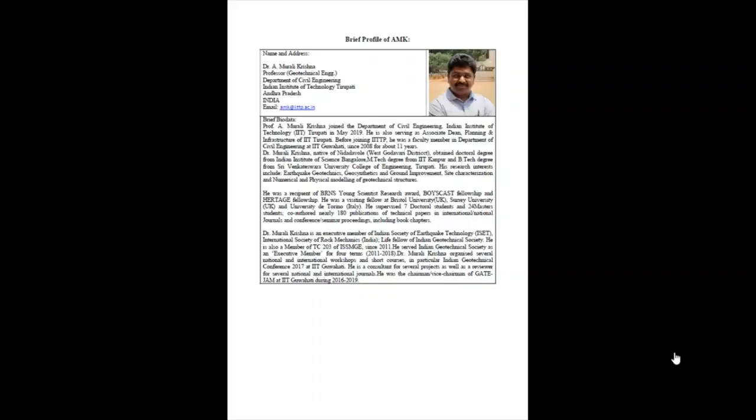Just want to know how many participants are there and who are all there. I can see only a couple of participants, something like that. And how many among them are students and how many are faculty, just to have some idea. Do you have something?

So we have almost around two sections, around 280 students plus faculty around 20. How many joined in this webinar? As of now, around 120, including faculty and students. So they may be joining.

Okay, fine. Coming back to the talk, today I have chosen the topic: sustainable utilization of scrap tire derived geomaterials for civil engineering applications.

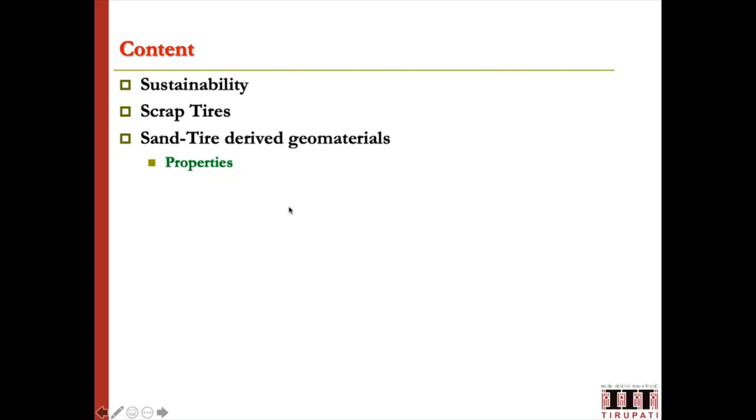The talk will go like this: I will briefly touch upon what is sustainability, what are the primary components of sustainability, and we will see some information about scrap tires - what are scrap tires, what are the problems associated with them, and then we'll see the term geomaterial, and scrap tire derived geomaterials - what are the various scrap tire derived geomaterials and their properties.

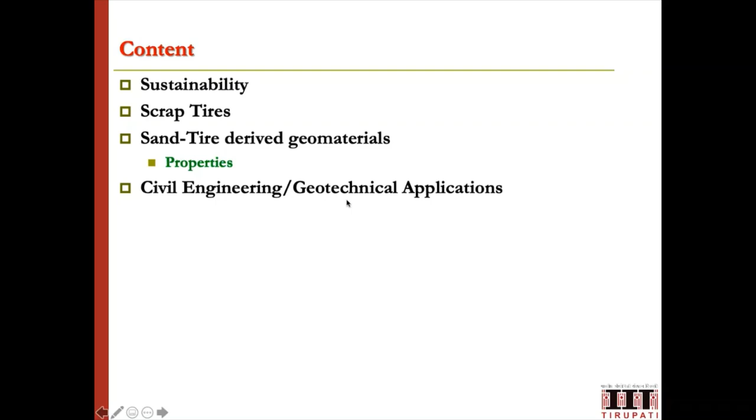Then we'll broadly see various applications in civil engineering, particularly focused on geotechnical applications. Then retaining wall applications, which is basically from my research, my students' research efforts - one master's student and one PhD student worked on using scrap tire derived materials for retaining wall applications. I will explain this through model studies and how we are addressing sustainability. That aspect will be touched upon at the end, and then I will conclude with my remarks.

This is broadly the content I have taken here.

Coming to sustainability, I'm not going into the topic in depth because it's vast - we could talk several lectures, there is a special course on this one. But as a simplified understanding, what is sustainability is just here.

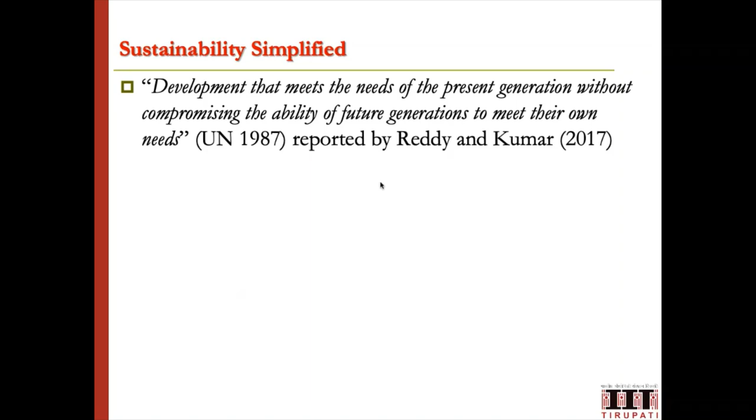That's the main object of sustainability over the generations. So it's basically sustainability linked with the 3 E's.

It's a triple bottom line concept they highlighted here. It will deal with the environment, and it will deal with economics, and it will deal with equity.

Equity, in the sense, means society and the people and their requirements - those societal things come under the equity content. And environment refers to what resources we are trying to use for any application or infrastructure.

At the same time, for any engineering structure or concept we have to balance the economics. So they are all interlinked - equity, society, and environment.

So there's growth, control, or conflict, as we keep on using the environment more now and in the future, with whatever complications arise.

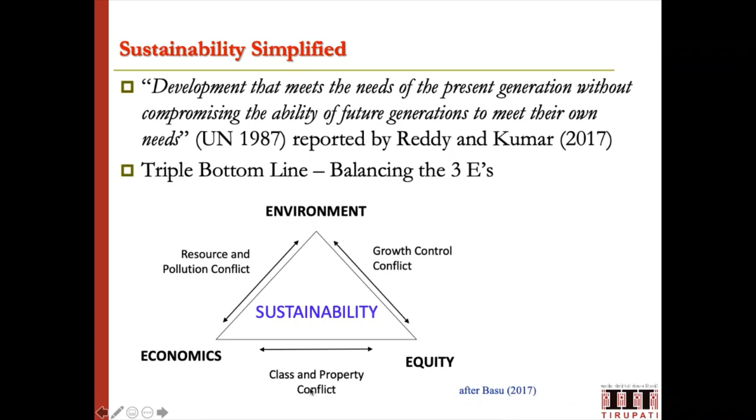Similarly, economics is linked with class and property, which creates conflict sometimes. If you make something very costly, fewer people can utilize it.

If you make it more reasonably economical, then many people can use it, but they will complement each other. And then environment and economics are again linked in terms of resource and pollution conflict.

We have to minimize pollution when balancing the environment. At the same time, we have to intelligently and smartly utilize resources as well, which need to be sustained for future generations, while also balancing economics.

It should be an economical project, so they are all interlinked. In a nutshell, what we can say is maintaining this environmental need, economic need, and equity need in terms of societal requirements.

If you are generating any project or product which is meeting present day requirements and can also help future generations meet their requirements, that's how we maintain sustainability.

That's basically sustainability in simple terms. We will now see how sustainability relates to today's topic.

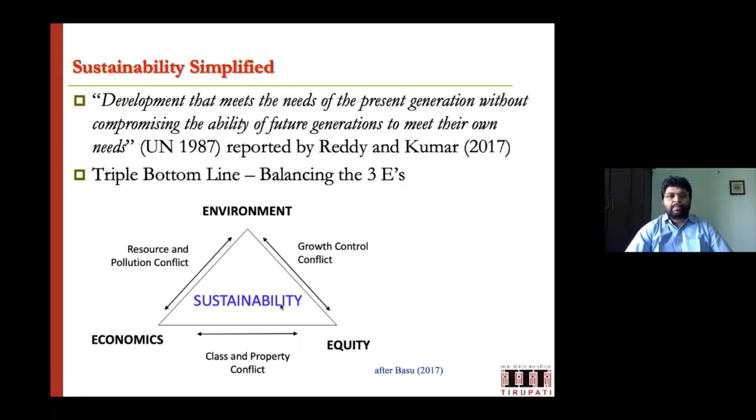Next, coming to scrap tires - what are scrap tires? Scrap tires are, as written here, undesired urban waste, which is increasing every year, as across the globe there is a tremendous increase in motorized vehicles.

So about 200 to 300 million tires in the United States, about 20 million in Korea, and about 112 million in India, which was reported in 2006.

That means almost about 15 years back this was reported. You can imagine what volume of tires is being generated now.

So in future, the increase will be significant in developing countries like India. Of course, now we are almost functioning like developed countries, but there is still some verge of development.

We can see much higher levels of development coming.

So what are the issues with scrap tires? As mentioned in the earlier slide, the rate of generation is very significant - huge amounts of scrap tires are being generated. What is the main problem?

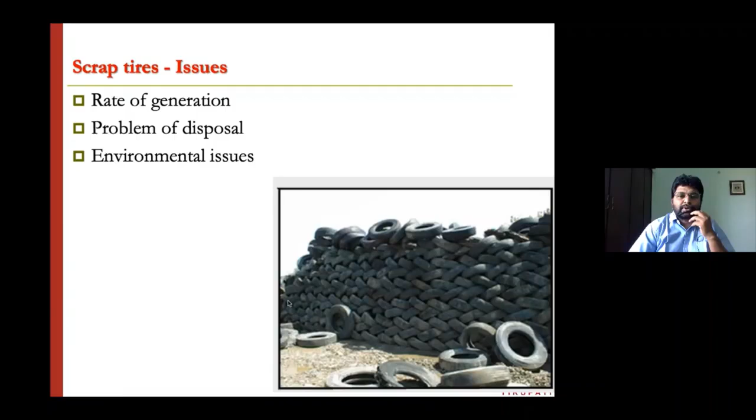So the way to solve these particular issues in a sustainability approach is to see the possible use of these waste materials for various applications.

This is the sustainability approach. What is the approach here? A waste material is something we try to use for some application. That way we can consume some of the waste material and reduce the disposal of the waste to some extent, though it may not be completely solved. Accordingly, we can reduce the problem of disposal to some extent, and the associated reduction in environmental issues can also be taken care of, because anyway we can't control the rate of generation. Only the second two points can be handled if we properly explore the sustainability approach in the utilization of waste scrap tire material for various applications.

Keeping this in view, several investigations are being carried out globally, and several applications were also reported in the literature, which were being used in different places.

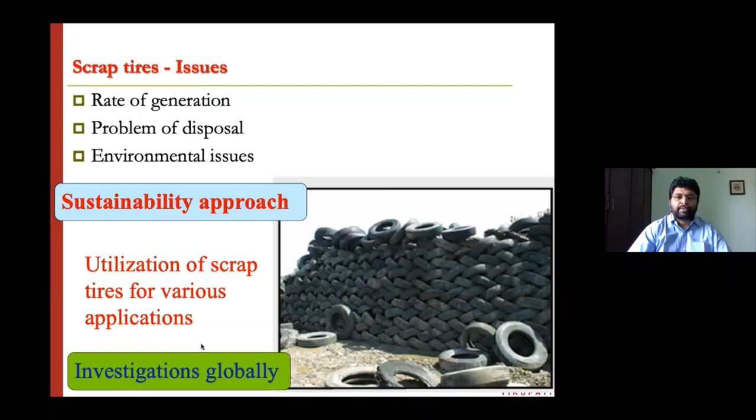So how are they utilizing it? The earlier slide showed some scrap tires being utilized for various applications. Which industry, which sector are they using it in? This slide gives some information, again from 2002. You can see the civil engineering application, particularly our current focus, is using about 14.2%, whereas other applications use different percentages. Another major use is in terms of tire derived fuel, which is utilized more. But it has different environmental issues, releasing a lot of pollutant gases and other things. It is not advised to use for tire derived fuel, but different percentages of people are still using it.

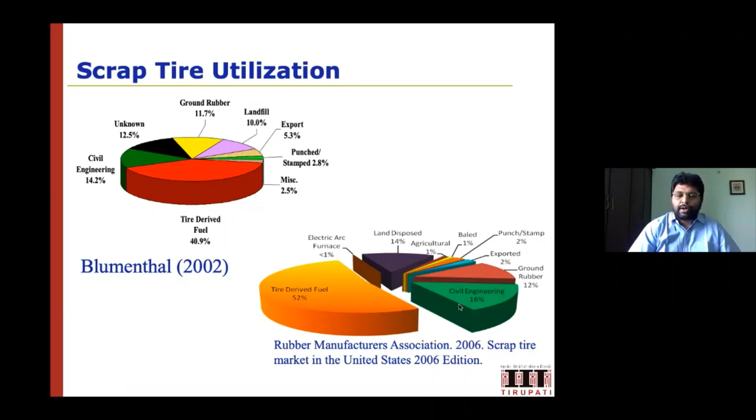Coming to the 2006 statistics, I want to draw your attention to the relative increase in the percentage of civil engineering applications. Here it was 14.2% in 2002, and in 2006 it became about 16%. There is a slight increase in civil engineering applications. That's how people are using these scrap tires in civil engineering applications.

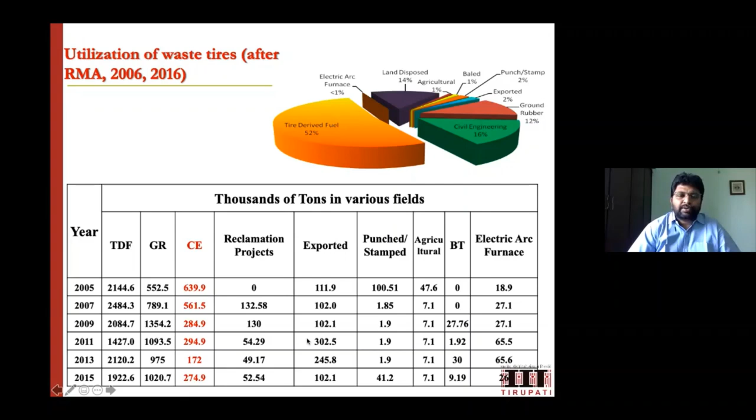Now coming to scrap tire derived materials, what materials can be obtained from scrap tires? One way is to use the tire as a whole, as a very bulky tire with a lot of mass. We can use it for some applications as a whole tire, or otherwise we can scrap it into different sized pieces. There is a particular ASTM standard on the use of scrap tires in civil engineering applications, which is our current focus here. We'll be looking into civil engineering applications.

In this ASTM standard, it shows different sizes and their names. It's broadly divided into three types. One is tire crumbs, with a maximum size of 12 mm, looking like this. Tire chips range between 12 to 50 mm, looking like this. Tire shreds range from 50 to 305 mm, about 1 foot in size. You can imagine when you cut big tires into 1 foot size pieces, you get large tire shreds in this form. So depending on the application, one can choose which type and size of tire derived material is suitable, and pick that particular material.

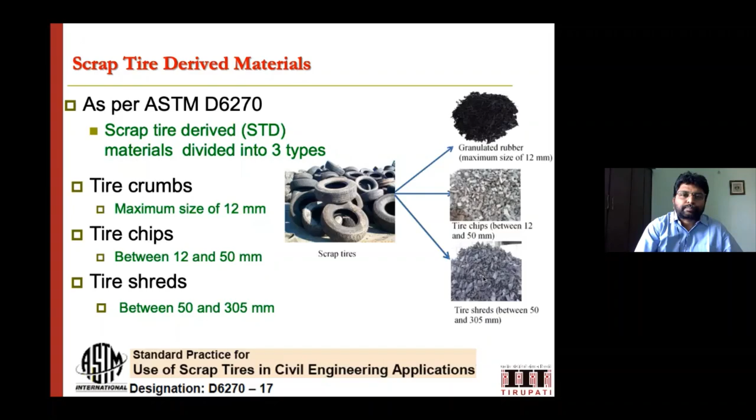Besides this, tire derived aggregate is another terminology now being practiced, using the tire with some other material extensively - crushed rubber from waste tire. Other than the earlier three materials and tire derived aggregate, if you crush this into a very fine form, you can use this as crushed rubber, which was recently reported in 2018.

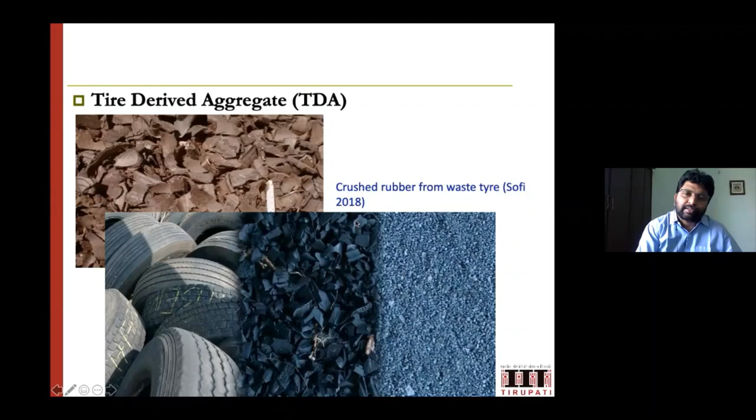Now that we understood what scrap tires are and what scrap tire derived materials are, we'll go a little into the engineering part of the application. When we need to go for engineering applications, we need to have the properties of the material, right? Otherwise we can't just take the material and use it, because there is a lot of engineering we have to do.

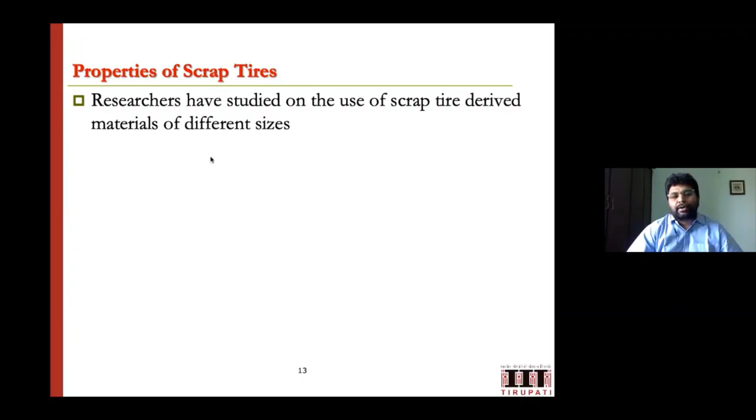So keeping that in mind, several researchers have studied the use of these scrap tire derived materials of different sizes. As I mentioned, it can be derived into different sizes, so we need to understand these different sizes and their properties.

This is some literature review on specific gravity. Basically, when you look into any material, first we look at the specific gravity - whether it's stone, concrete, cement, brick, or soil, whatever it is. For specific gravity, unit weight is a very important parameter.

You can see the range of specific gravity of studied tire chips is ranging from 1.02 to 1.24, as reported by different researchers who have worked on that. The unit weight values can range from 2.4 to 6.96 kilonewton per meter cube.

I want to give a thought to the students here - think about the range of specific gravity of various common engineering materials you've come across, particularly aggregate, brick, or soil. What is the range of specific gravity? What is the range of unit weight you are dealing with? And then compare that to the range of values you get from tire materials.

Obviously, if you compare these things, you can see the very low specific gravity and very low unit weight. With these properties, you can combine this tire material to make a material with much lesser weight - that is one immediate observation one can make, right?

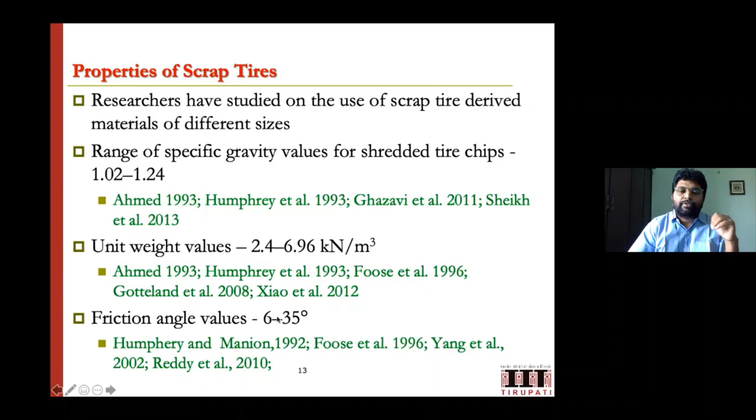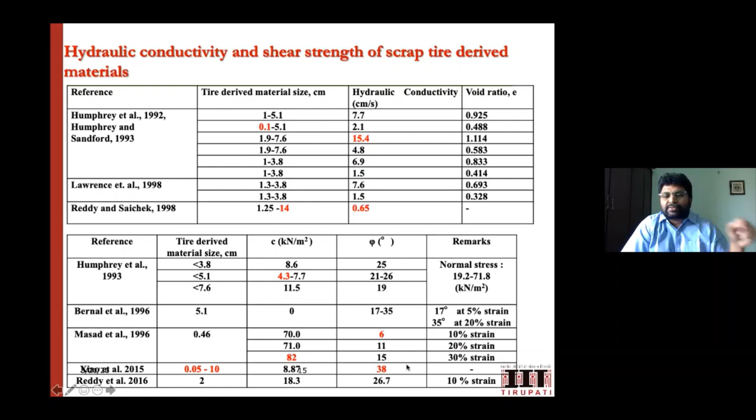Okay, so these are different values. Now, so that covers the STDs, scrap tire derived materials and their properties. The use of the STD materials, how we can use them.

As an engineering application, particularly in civil engineering applications, you can see STD materials are used in a wide range of civil engineering applications due to the advantages in their properties. We have seen the properties.

Values, and we can also, most of us know the durability of the material, how it will be there. So it has high durability, okay, low compacted dry density and thermal conductivity, and high hydraulic conductivity is there, and high compressibility.

When you are keeping the scrap tires, they have a lot of voids, they can get compressed, they can absorb a lot of vibration. This is another good property we can get from the scrap derived materials.

So large studies are available on scrap tire derived materials applications, particularly for engineering applications, in terms of physical, numerical, and field model studies in the context of retaining walls, foundations, embankments, etc. So here particularly it is focused on theoretical applications, and different studies have been reported on that.

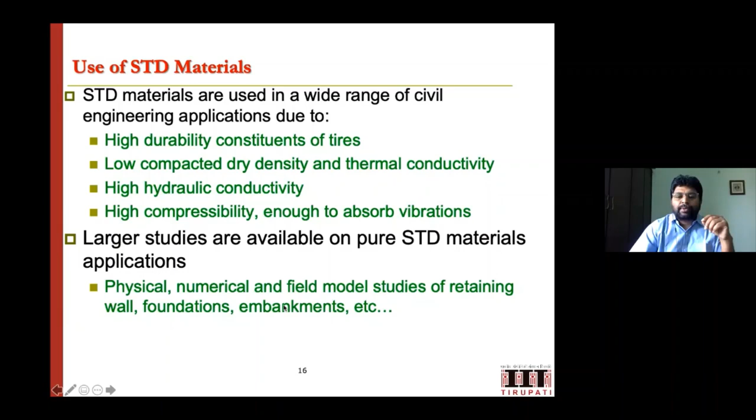Okay, with that, we'll just see broadly into what are the different civil engineering applications this material can be used for. One is the partial replacement of aggregates, which can be used in mortar and concrete, reported by these researchers. And in terms of asphalt mixtures for pavements, reported by these researchers.

They can also be used in landfills, massive landfills, and the backfilling of retaining wall materials, which is the current focus here. That's why it's highlighted here.

Different researchers have used this, and as we understood from their basic property, they have high permeability, so they can also be used as a drainage material, as a drainage system.

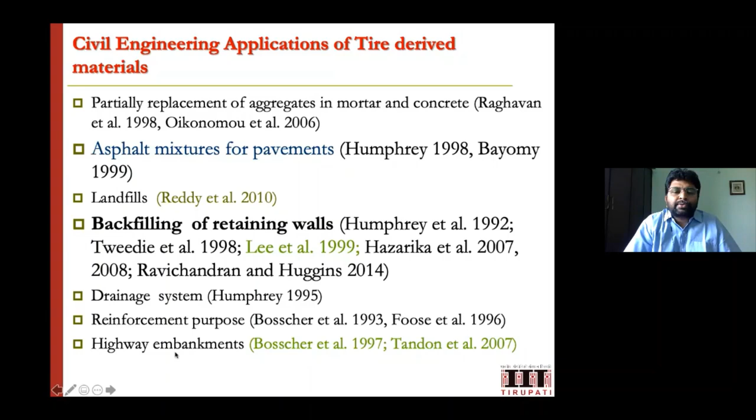Further, it can be used for reinforcement purposes and highway embankments, not only pavements - they can be used to build huge volumes of embankments also.

So these are some of the pictures which are reported in the literature. You can also browse through particular websites to see different pictures. Some of them I tried to put here just for completeness.

You can see here road embankment constructed with shredded tires, and shredded scrap tire used in road base in Odessa, Texas.

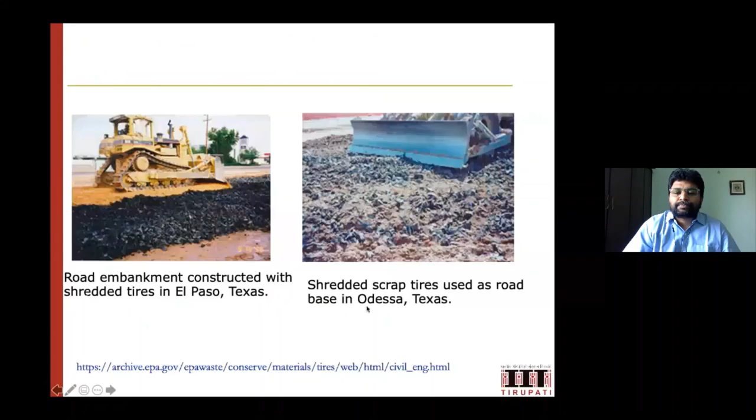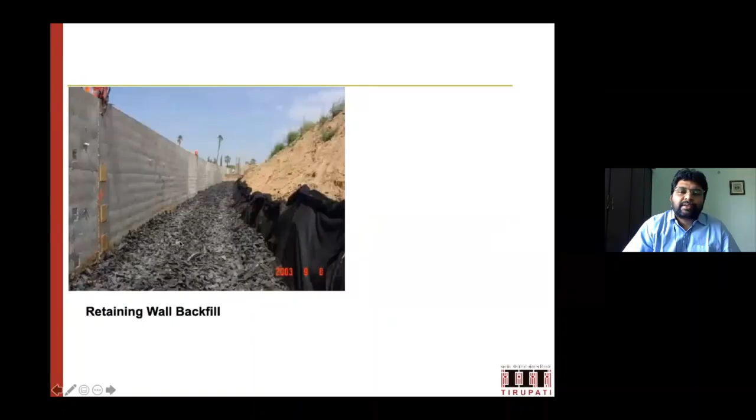And vibration damping layers beneath the rail lines are used, and the retaining wall backfill. There are some studies on the retaining wall backfill using such compressible materials.

So protection of seawall by using whole tires, as I mentioned, directly whole tires can be used for protecting the seawall or certain embankments, which can absorb a lot of energy.

Tsunami overflow testing apparatus - this is a study again conducted by Hazarika and group. When the tsunami overflow is happening, and immediately if you keep this huge volume of tires here as a whole, they work like very good dampers. They damp a lot of energy, and further losses and damages due to this water will be very less here.

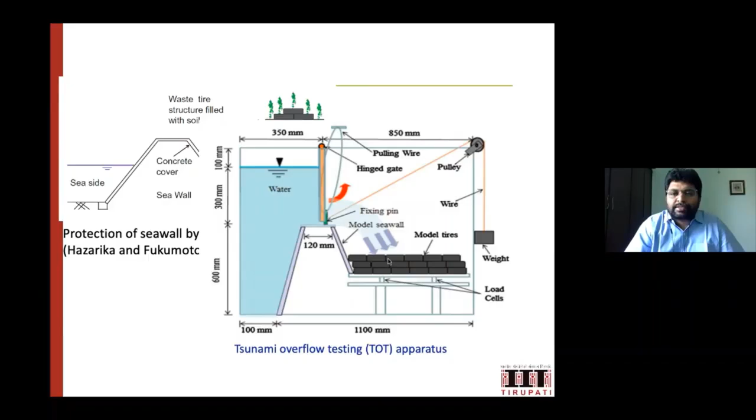So this is another thing - they can be used at the back of the retaining structure, gravity type retaining structure. There's a tire chip cushion there, and they can also be used in terms of drains, as tire chip drains here.

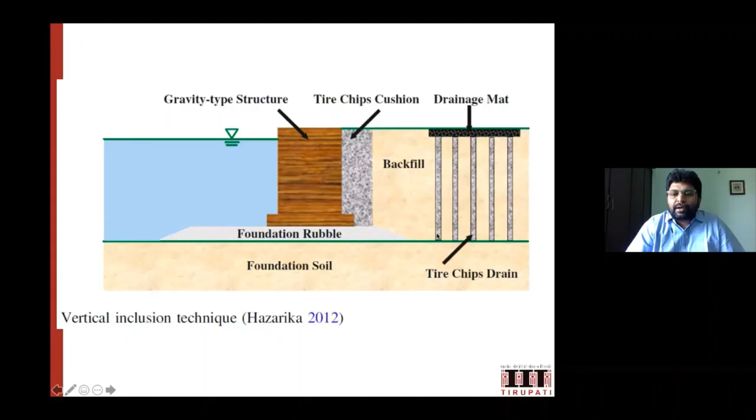And the use of tire rubber particles into concrete to replace the mineral aggregates, as it's also highlighted. Some studies are available in this aspect also.

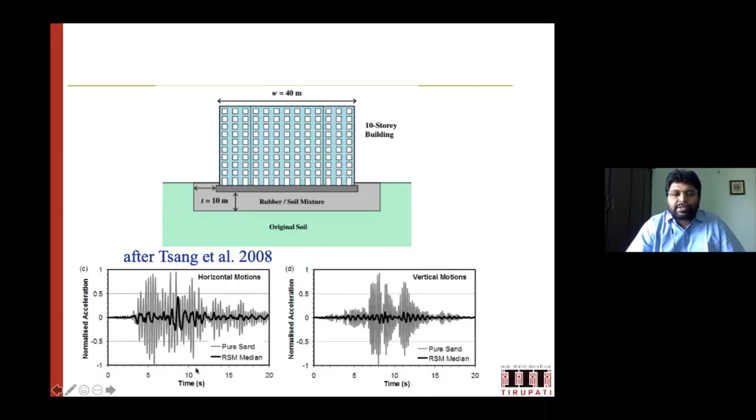This is one study where they showed base isolation using the rubber or soil mixture. A civil structure at the base uses the rubber and soil mixture, which is being tested to show it is absorbing those vibrations.

So that's about in general civil engineering applications. In terms of pavement structure, retaining structure, embankment, even buildings, and as tires alone, it can be used as geotechnical structures also.

Now coming to the geotechnical applications, what are the advantages one can get when using these scrapped materials into applications? One is that it creates a sustainable future, referring to the earlier sustainability concepts. If you are able to use the tires into applications, you are reducing the waste, you are reducing the disposal problems, and some significant part of natural material is being replaced by this waste material. That means you are reserving some of the natural material for future generations.

So in that way, we are trying to maintain sustainability. It creates a sustainable future, and it can also be used for reducing vibration. It can also be used to protect pipelines buried in the ground, because it has a lot of cushion and absorbing behavior.

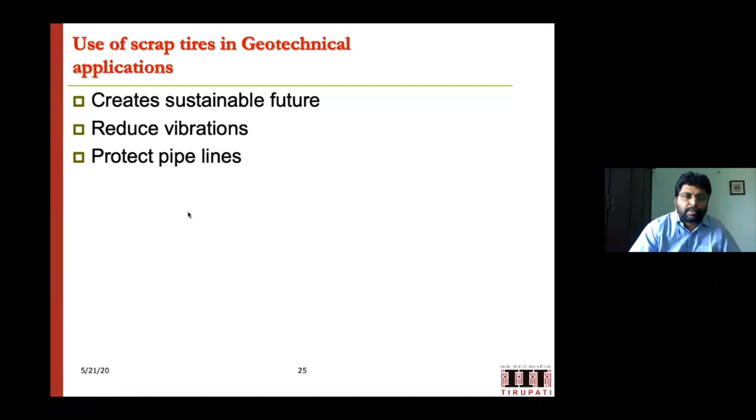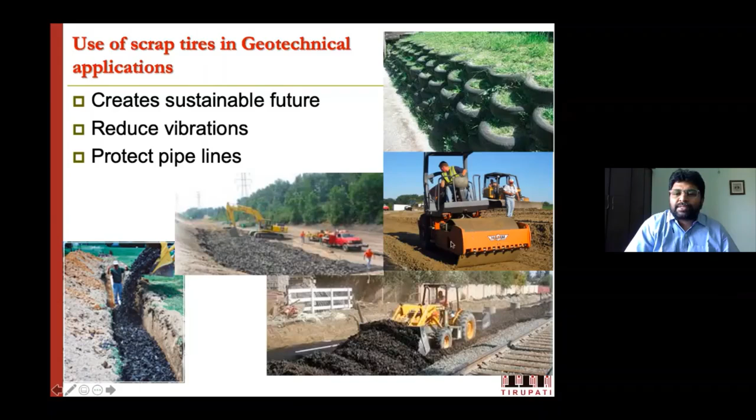Some of the applications again shown in the context of geotechnical applications. Some of these things which we have seen earlier also, like tires forming a small retention system, an embankment, a drain system, and subsurface drain for railway lines. One can see using the tire mixture into the pavement system. So that's various applications one can think of.

Particularly in earth retention systems, which we will be focusing on a little bit more. These earth retention systems are invariably being used in various infrastructures in urban development countries, because we are doing more development, more construction, and many retention systems are required, such as basement walls, bridge abutments and other structures.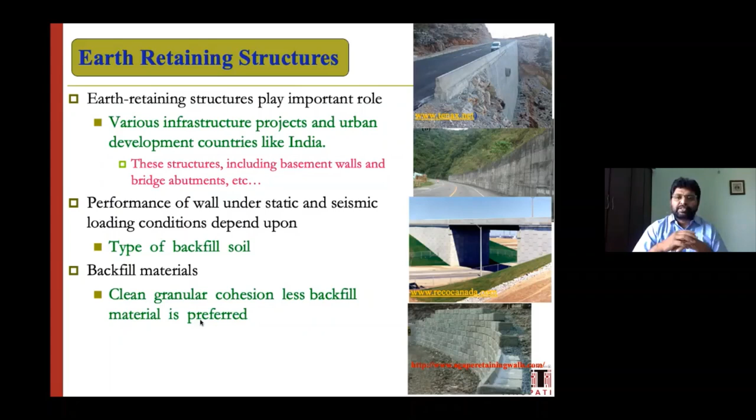So performance of these earth retention systems, retaining walls, basically depends on the type of backfill soil. Depending on the backfill soil, how much earth pressure comes onto the wall is decided, and the design of the wall structure also depends on how much pressure it is getting. Preferably the backfill material should be a clean, granular, cohesionless material, because it should be easily drainable. There should not be any excess pore water pressures which would cause detrimental effects on the retaining structures.

To minimize these issues, for example to reduce the pressure coming onto the structure and to reduce the demand, one can go for lightweight materials. Different lightweight materials can be listed as tire-derived geomaterials, EPS geofoam, lightweight aggregates, or wood fiber. This is some sort of material which can be used as lightweight materials, and of course fly ash, slag, blast furnace slag.

These are again predominantly used by our Indian researchers, because they are generated by different mines and thermal plants, which generate this slag and fly ash also. So on the other side of this topic, use of slag and fly ash is also a sustainable application one can see, which can be explored if somebody is interested.

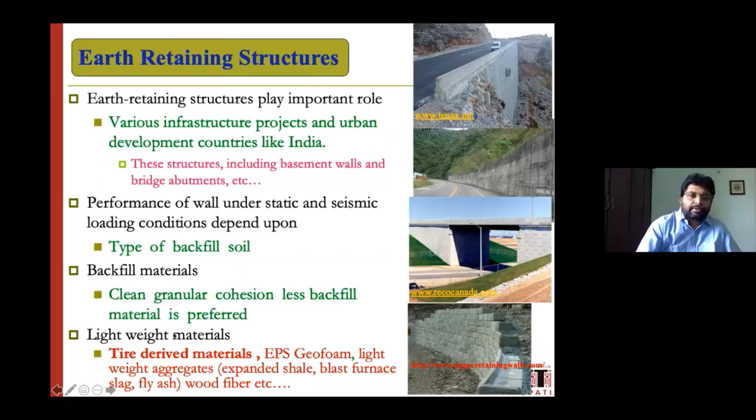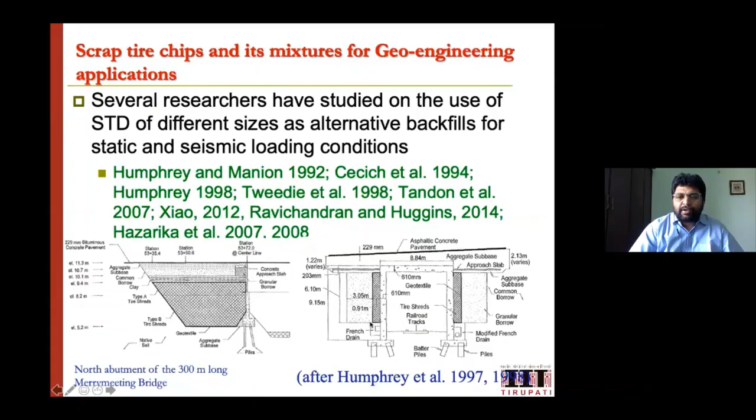So using the scrapped material as alternative backfills, including static and seismic loading conditions, different researchers have worked here. This is the abutment, and this is the retaining wall application where they have used it at the backfill. Some studies have shown the effectiveness of these materials.

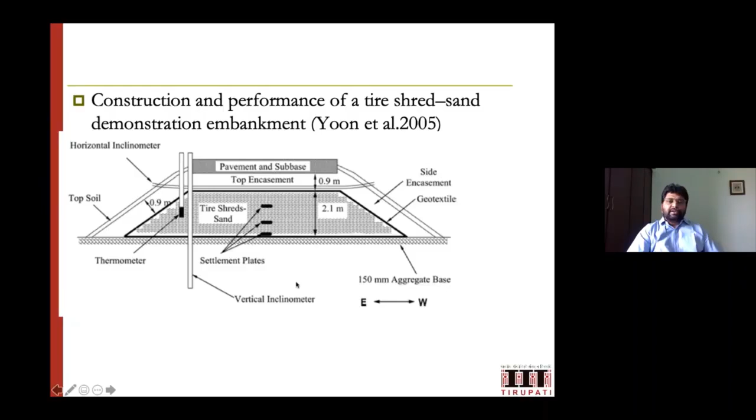So why I am saying all these things is that gradually we are looking into the material properties and their application. Before going to systematic application in the field, one needs to do thorough studies in terms of either numerical simulations, some analytical calculations, or otherwise some sort of model studies. These are the model studies which I am trying to show, how different people are using them.

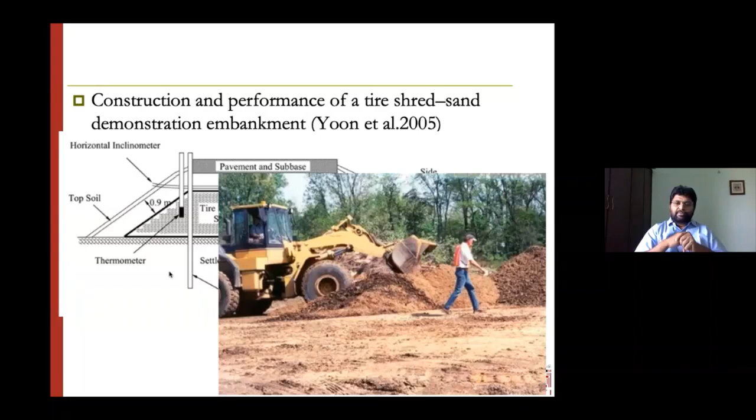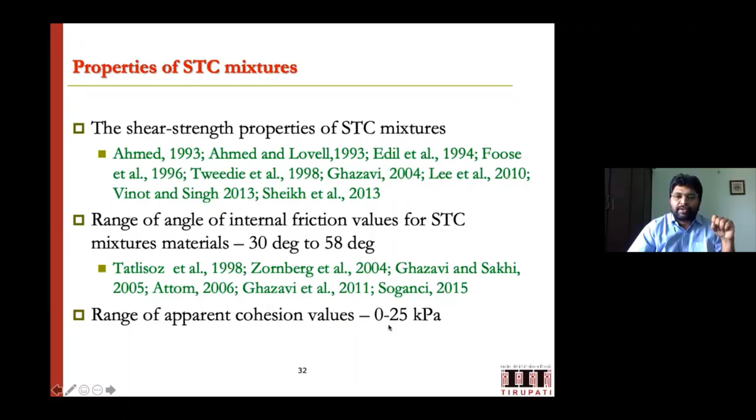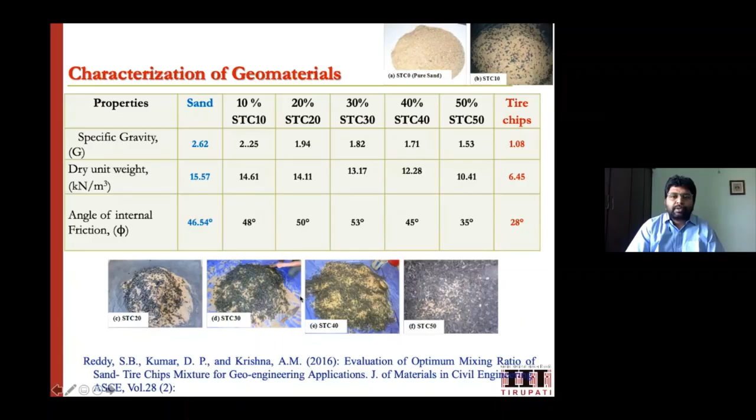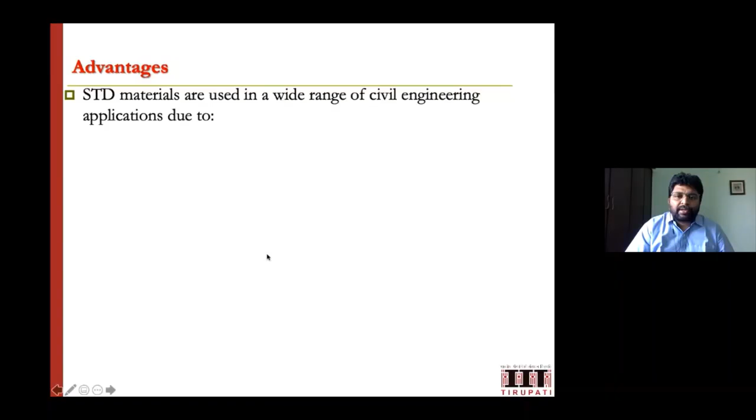These are some of the properties we have seen earlier, all obtained from this basic material characterization. Now we characterize it as a material alone. Now we are moving to the application.

As I mentioned, our focus in this talk is to show retaining wall applications. Our students have tried some model studies to see the response of retaining walls using tire chip derived materials. We built rigid-faced wall models of 600 mm height and 600 mm length. This model wall was built in a Perspex container, 1200 mm long, 600 mm wide, and 1000 mm high.

This is a Perspex container wall. The wall facing was built with hollow rectangular sections, which are connected by different connecting rods. I will show that.

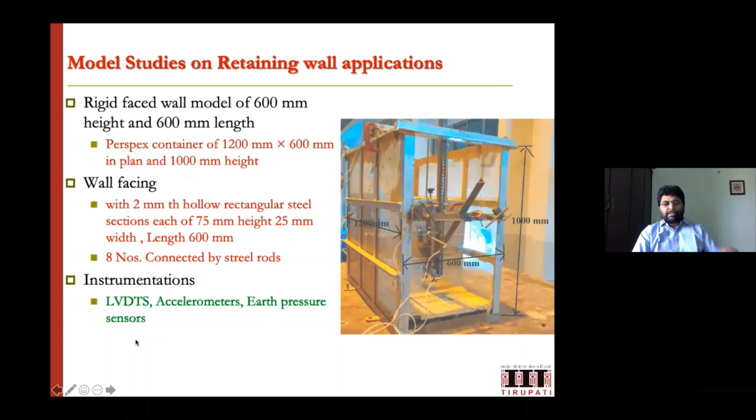Various instrumentations were used: LVDTs to measure the displacements, accelerometers to see the acceleration response, and earth pressure sensors to see what earth pressure is acting on the wall. This is how the physical model wall was developed.

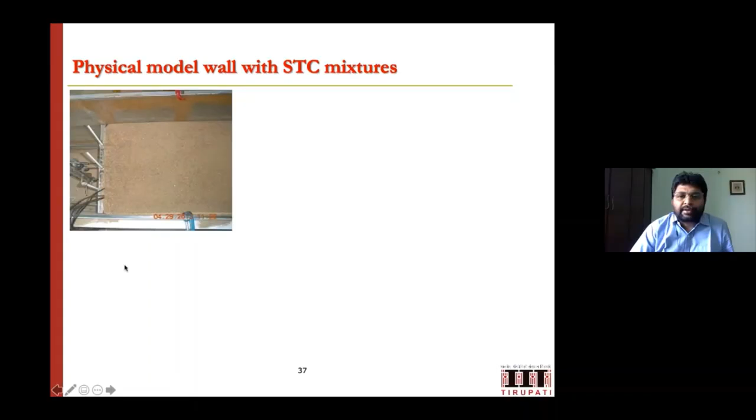This is the wall facing, and sand and sand-tire mixtures were put in different layers and compacted at each layer. Before making this model wall, several trials were done to check what percentage mix, what density, and what unit weight we are obtaining. Different trials were done, and accordingly the model was prepared.

At the top, the surcharge was applied in terms of concrete blocks. These are the LVDTs which were placed on the face of the wall to measure the wall deformation.

As a study, we conducted both the static study and the dynamic study. For the static study, static surcharges were applied in terms of concrete blocks. In the dynamic study, we applied different types of earthquake excitation, seismic excitation, to see the wall behavior.

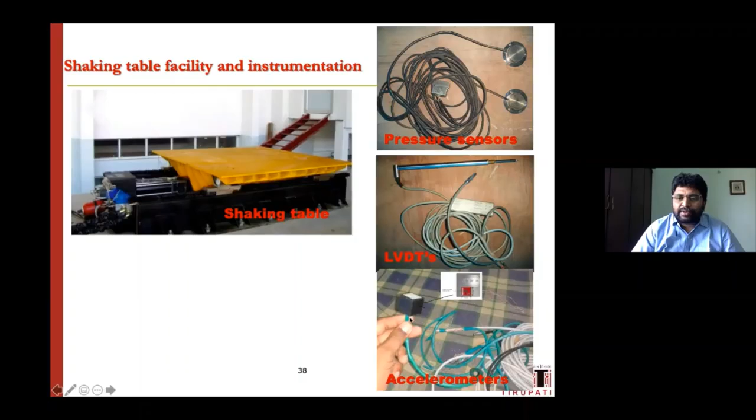This is the shaking table available at IIT Guwahati. On the shaking table, the model container was placed, and inside it you can see the wall that is prepared. These are the earth pressure sensors installed inside, the LVDTs, and the MEMS-based accelerometers used to measure the acceleration.

All the data during the static test and the dynamic test was obtained through the MGC HBM data acquisition system, which was connected directly to a laptop. All the data was captured into this data acquisition system.

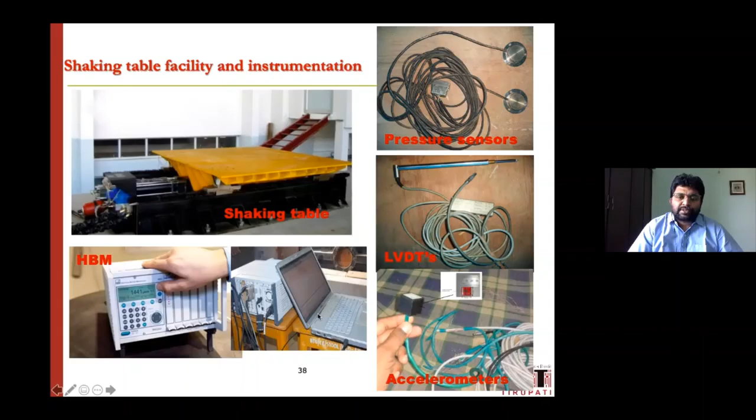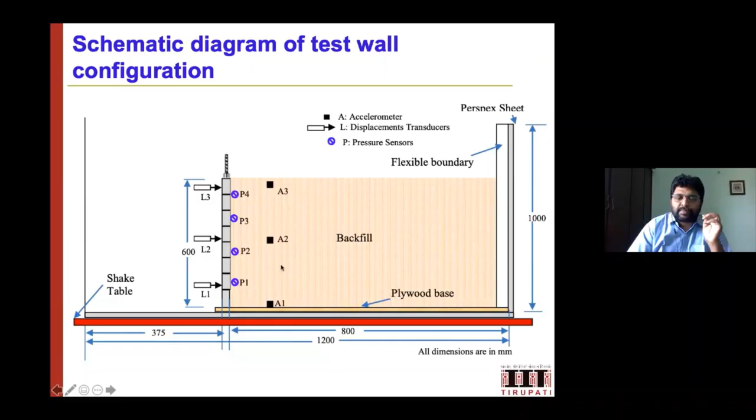The static test involved preparing a model wall with different sand-tire chip mixtures and applying concrete blocks, increasing the surcharge gradually. You can see the tests here with different types of backfill material: 0% means pure sand, and STC 50 is 50% tire chip material. Surcharges were increased gradually from 0 to 10 kilopascal, meaning no surcharge up to a maximum pressure of 10 kilopascal. This is the publication reporting these tests and details.

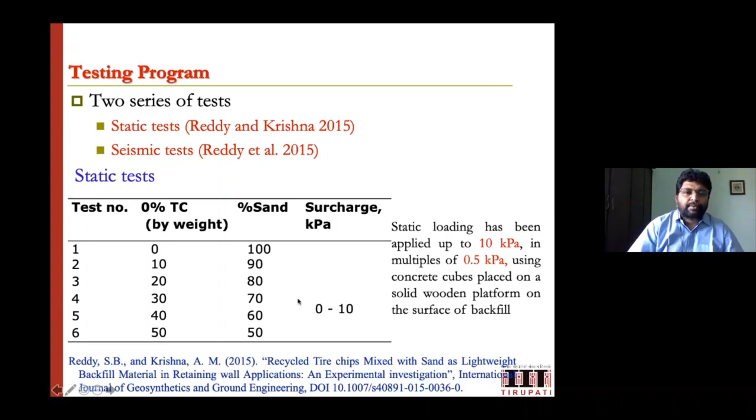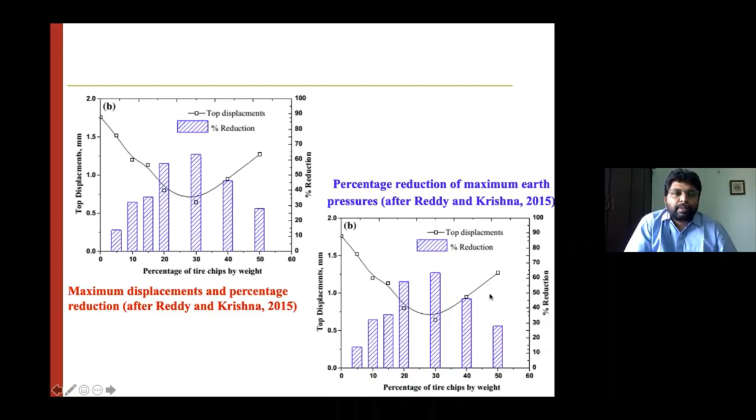So that's about the static test. What is on the static test? It was observed that with including tire chips into the sand, about 30 to 40% of the mixture, meaning STC 30 to 40%, we are able to get reduced deformations and reduce the earth pressures under static conditions.

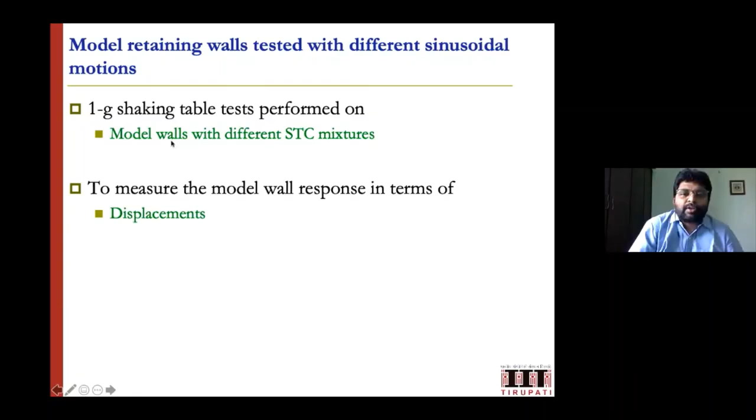Further, shaking table studies were conducted to see the seismic response. Model walls with different STC mixes were tested to measure the response in terms of displacements, internal earth pressures, and acceleration amplification factors. If you recall the instrumentation figure, accelerometers were placed at the bottom, middle, and top at different heights. If you normalize the acceleration at different elevations with reference to the acceleration at the base, you can calculate how much it is being amplified. That's how the amplification factor is calculated, which will be used for further discussion.

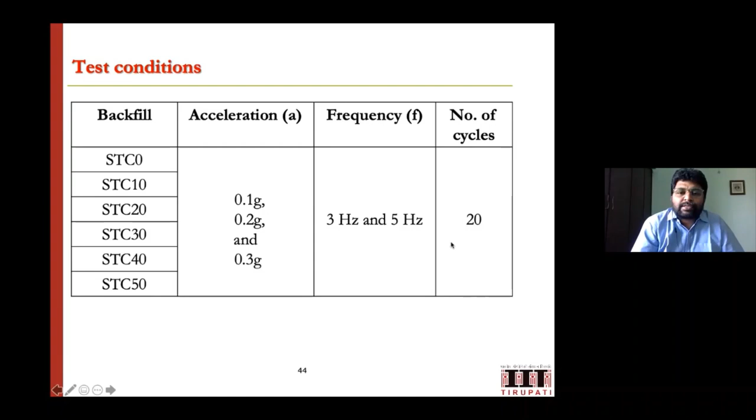For this test, backfill was prepared with different STC material from 0 to 50%, and different accelerations and frequencies of excitation were used, up to 20 cycles, for testing the walls. This is a typical result obtained: 20 cycles of excitation, where A1 is at the base and A2, A3 are at different elevations, showing how they are amplified or de-amplified.

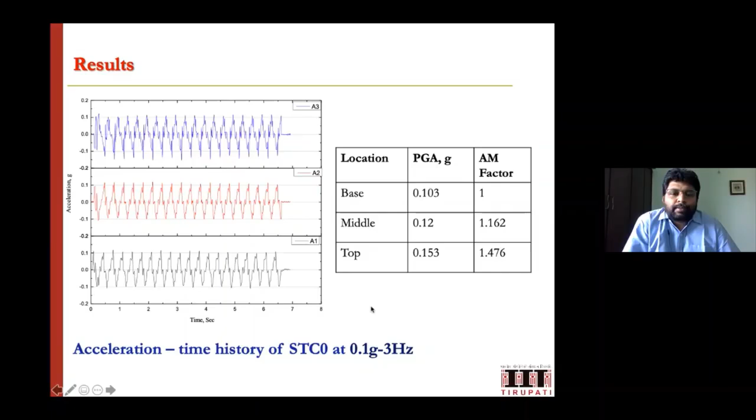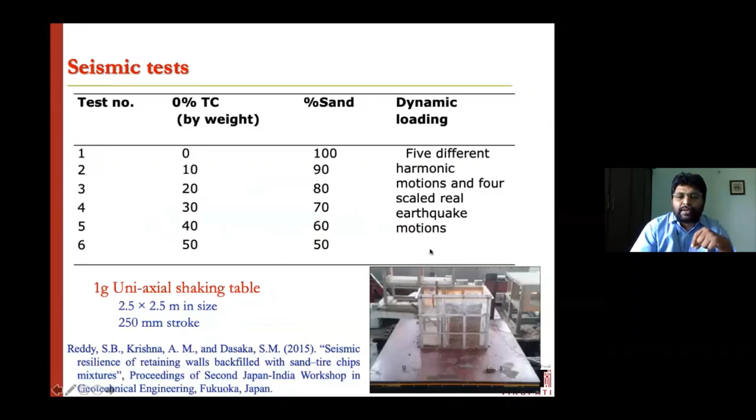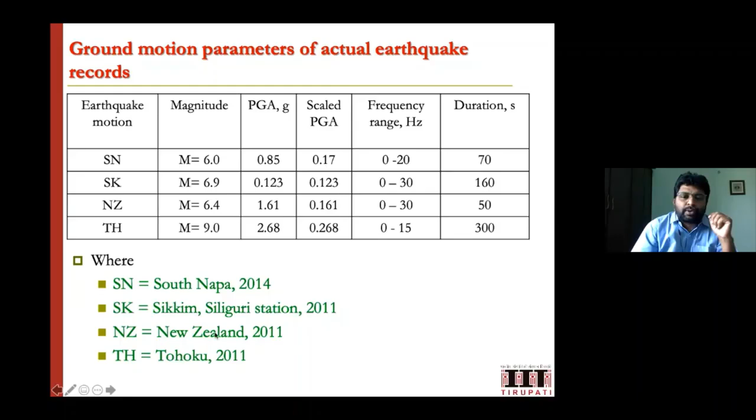This is like seismic tests using real earthquake motions, whereas the earlier tests were pure sinusoidal tests. Four different earthquake motions having different magnitudes and different PGA values were used, with different durations ranging from 50 seconds to 300 seconds. These are the codes used for different types of earthquakes like Tohoku and New Zealand, representing the real earthquake motion and their data.

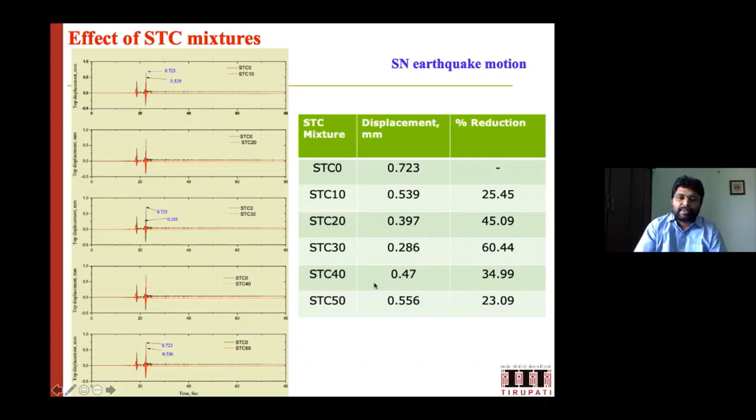This particular table shows the data for the SN earthquake motion - the peak displacements obtained for different backfill material walls, and the percentage of reduction with reference to STC0. Please note here that displacements are very small, less than 1mm, but relative percentages were calculated as per the model behavior.

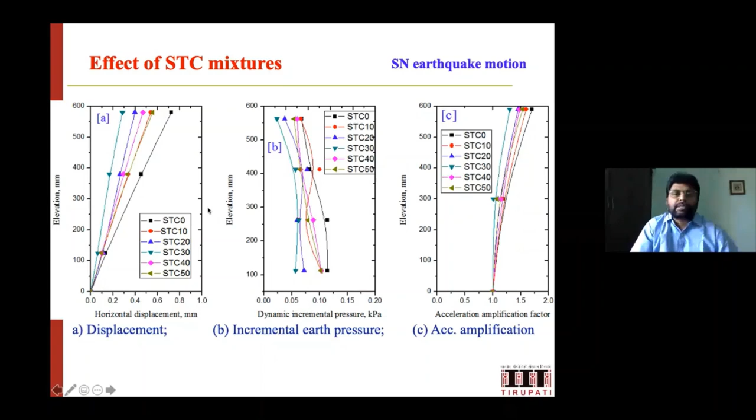STC30 showed very less deformations. Similarly, STC30 showed very less amplifications compared to other materials. This is the overall observation of how much it is being affected. So that is one particular model of retaining wall using the rigid faced wall, and its behavior.

We also studied another type of wall - I hope you can recall the particular model wall. This is the cantilever type retaining wall model, which is more commonly used in application. This wall was built with foundation material also included, with some embedment - a more realistic setup commonly used, and the backfill material was replaced with different mixtures. This model wall was developed using 2mm thick aluminum sections, rectangular hollow aluminum sections.

They were joined together to form a cantilever model wall. If somebody wants to increase the length, sections can be added, or removed to change the toe, base, heel, and height of the wall. One can try some model studies, but for this particular study, we didn't vary much—only one particular configuration was studied.

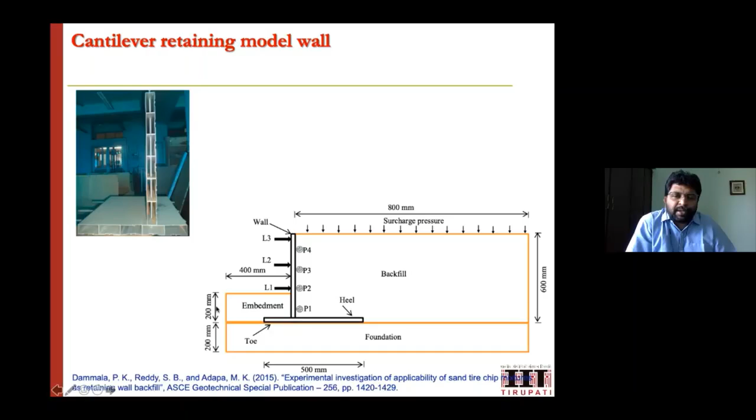Again, you can see L1, L2, L3 LVDTs, and P1, P2, P3 pressure sensors placed here. This is the cantilever model wall, and we also measured the top surface deformation using this setup.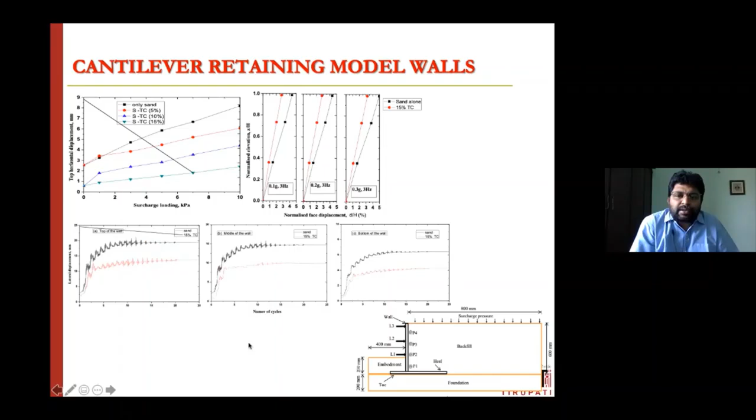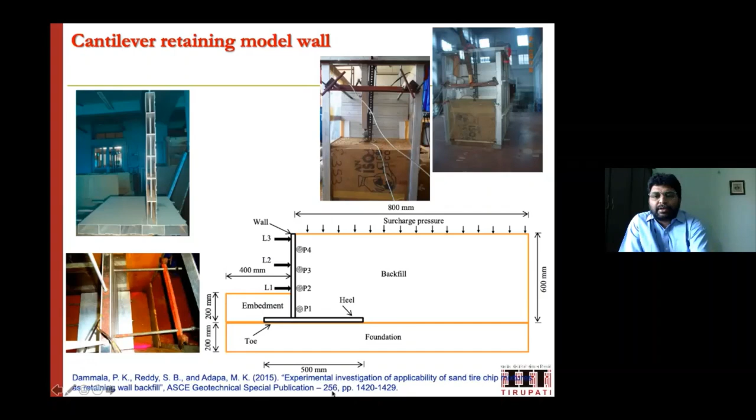The responses—displacement histories, accelerations, and profiles in the vertical section—are shown here for this mode of wall. Details of these results can be found in the ASCE special publications. If interested, one can go through them; I've just given a glimpse of the typical results.

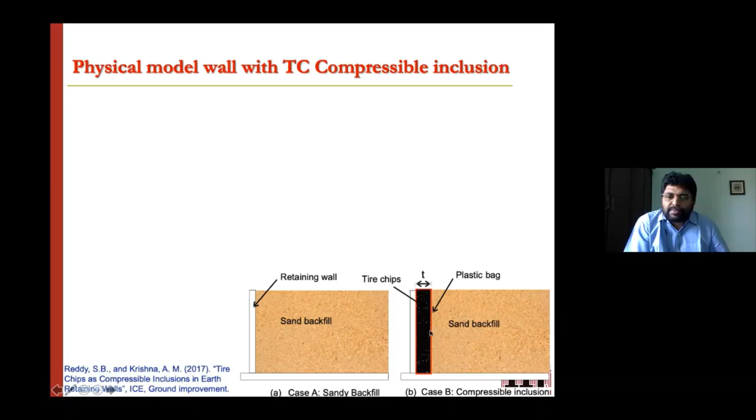Another mode of use of the material is using tire chip material just behind the wall as a compressible inclusion. This is the third mode of wall, and it's a rigid faced wall—the wall section is fixed to the base. This includes a pure sand fill and a sand backfill with compressible inclusion using tire chips. A plastic bag was used to hold the tire chips so the sand and tire chips wouldn't mix. This is how the setup looks in different configurations.

Again using LVDTs, accelerometers, and pressure sensors to observe the response. The details of this particular study can be found in the Ground Improvement Journal, published in 2017.

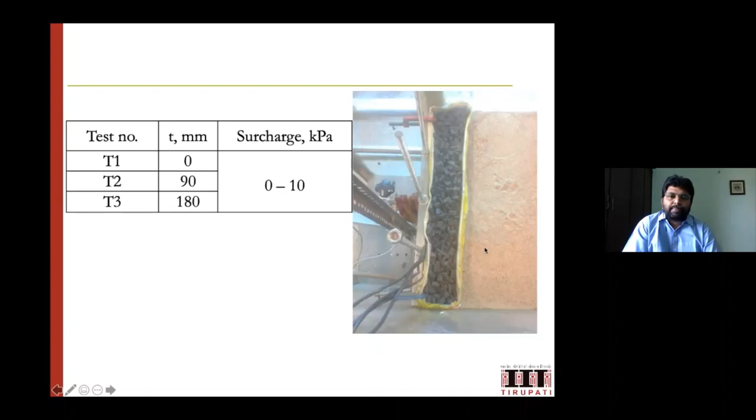For the tire chips, two different thicknesses were used: 90 mm and 180 mm, with only three varieties but the same backfill. Static tests were done with 0 to 10 kPa variation, and the results are presented here.

You can see that with only sand, there is a huge top displacement, but with the compressible inclusion applied, you get significantly lesser top displacement. You can see the variation here. These maximum displacements at 10 kPa surcharge were plotted, along with the percentage reduction in displacement.

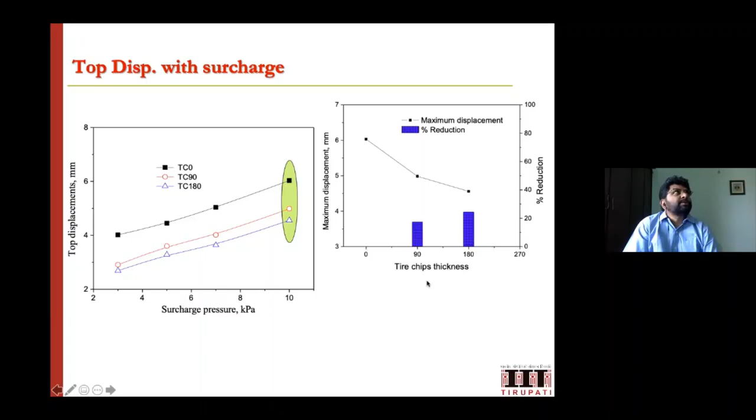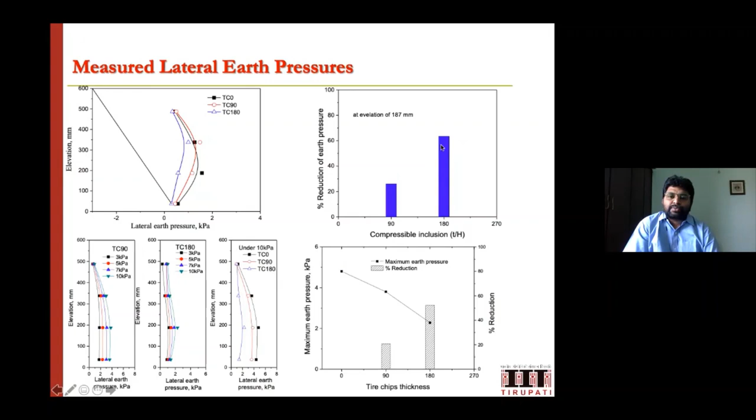Similarly, maximum lateral earth pressures are plotted along with the percentage reduction shown here. You get about 30 to 70% reduction in the earth pressure.

This is a comparison of displacements and pressures under seismic excitation. Different earthquake excitations were applied, and we observed the reduction for different compressible inclusion thicknesses of 90 mm and 180 mm. Broadly, for 180 mm, the reduction is very significant—you can see from 63 to 68%, a huge reduction in terms of earth pressures.

For the 90 mm compressible inclusion thickness, you have a reduction from 30% to 45-46%, whereas with 180 mm compressible inclusion, you get about 60 to 70% reduction in the earth pressures.

That is the advantage of using sand and tire chip derived material as a mixture in different modes of walls—rigid faced wall, cantilever model wall, and with compressible inclusion. The observations were very encouraging, showing that use of tire chip material will reduce the deformations, pressures, and their demand.

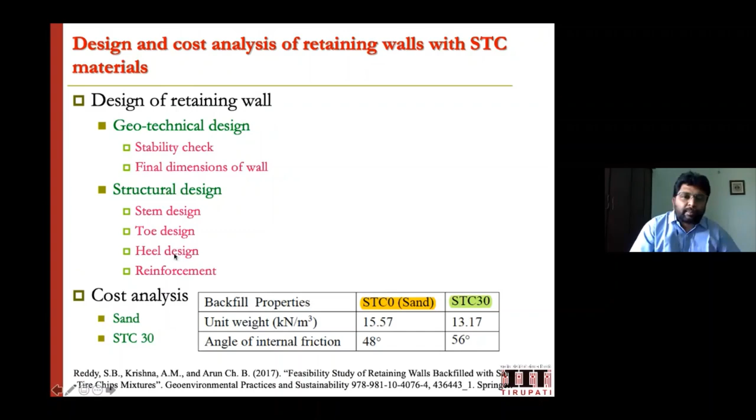Using these two materials, the particular parameters were determined, and then cost analysis was carried out for both types of walls. These are the typical range of parameters one can adopt for designing a retaining wall, as per Bowles 1988, which gives a general range of dimensions one can start with.

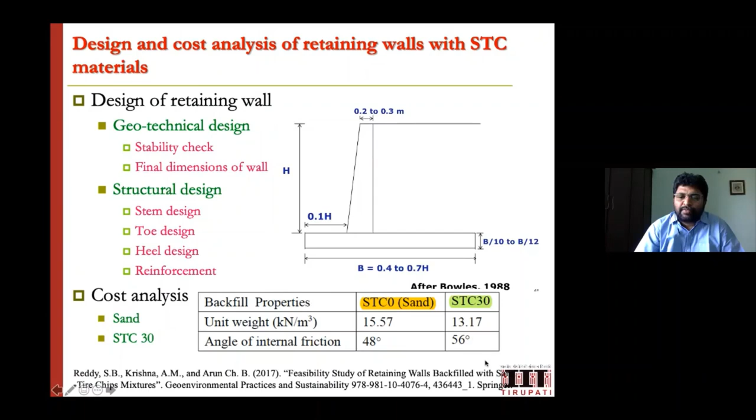Using those things, the geotechnical design was done, and bending moments and other parameters were calculated using the material properties obtained. For the sand type material, you have a unit weight of 15.5 kilonewton per cubic meter and a friction angle of 48 degrees. For STC30, it's 13.17 kilonewton per cubic meter and 56 degrees friction angle. These two parameters were used in the design.

From here one can calculate the earth pressure acting on the wall, then the bending moment, earth pressure diagram distribution, and bending moments overall. I'm not going into detail, just presenting the maximum bending moment and maximum shear forces for 2-3 different elements: stem, toe, and heel. What are the values here?

You can see clearly the sand case and the STC30 case values here. Just by looking at these, one can say that the STC30 mixture is reducing the demand in terms of bending moment resistance and shear force resistance to some reasonable extent. So keeping all this, maximum earth pressures and maximum bending moment and shear forces for the different cases were calculated.

Finally, based on all this, for retaining walls of 3 different heights—3 meters, 6 meters, and 9 meters—with different materials, the dimensions were arrived at following the appropriate calculations. For this material design, we got the stem, base, and whole wall design considering the bending moments and earth pressures. This is the final dimensions.

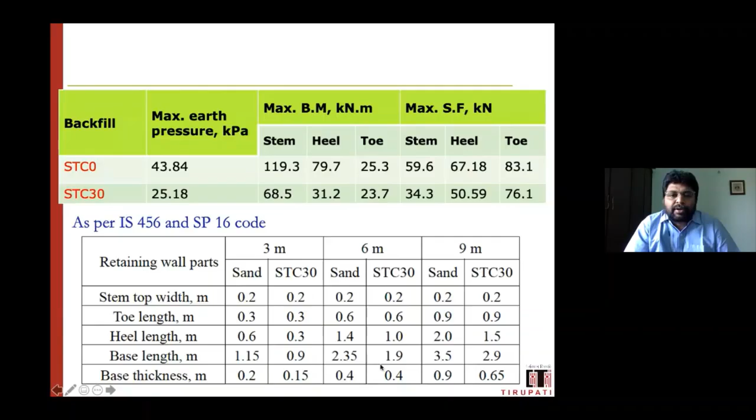Now for these particular dimensions, material cost and estimated total cost were calculated. For materials, this is the cost being taken here—cost ranges obtained from the local market and from literature. In this study, the costs for steel, cement, aggregate, and tire chips per kg are shown here, and estimated costs were calculated.

You can see for different heights of the wall, when using two different materials, sand and STC30, the cost for different heights of the wall is shown here. The percentage saving with reference to sand versus STC was calculated and shown. This is the total percentage of saving obtained.

This is only in terms of the backfill material shown here. Estimated total cost, including structural design, reinforcement, and all other things, was also included. So the total saving, how much we are getting, is shown here.

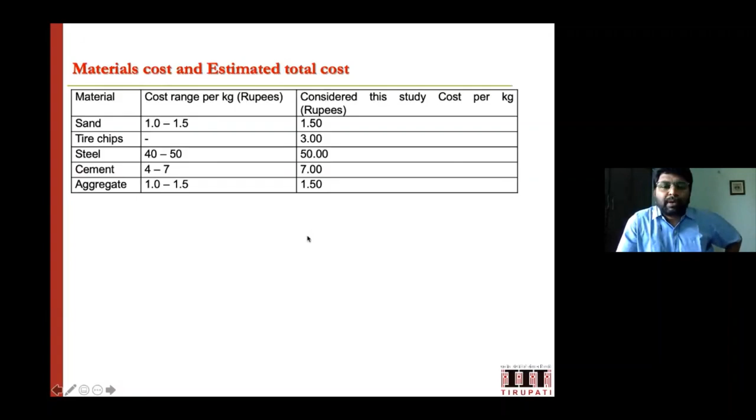In this case, we have taken sand cost as 1.5 rupees per kg, whereas tire chip cost was taken as 3 rupees. Why so? Because when doing small scale work, if tire chips are not abundantly available, you may get scrap tires easily, but cutting them into proper pieces and arranging them may take extra time, so you may incur more cost.

Even in that case, you are able to get a significant reduction in the range of 20% in cost. Suppose if you consider sand cost and tire chip cost to be the same, even then you are able to achieve an economic benefit of about 30% cost benefit. So that's how it shows they are also financially viable and economical.

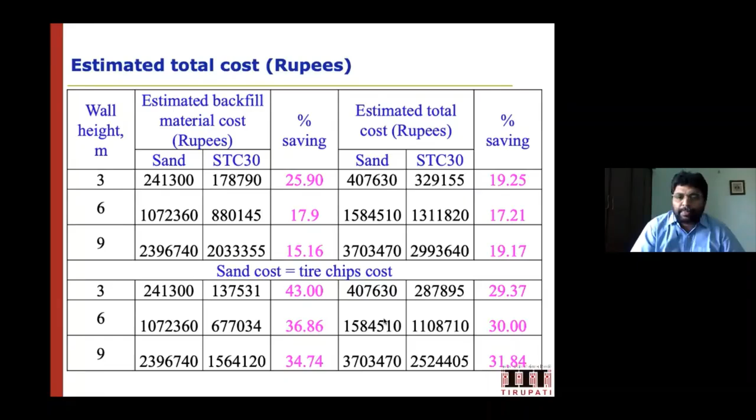So now, coming to the conclusions, closing. I have given an overview starting with sustainability and scrap tires, scrap tire materials, properties and applications. This is overall what we have taken.

And we have looked more closely into what studies, research studies one can do, and what we have done particularly in terms of retaining wall applications, and we also evaluated the sustainability concept. So these are some of the conclusions I hope you must have got from the earlier slides. Otherwise you can just have a look.

STC materials have different advantages and engineering properties, which encourage you to use them for various engineering applications.

If you directly take sand-tire chip mixes, about 30 to 40% mixture gives more beneficial properties, about 20% reduction in dry unit weight, and at this unit weight it will occupy about 50 to 60% of the natural material. So your sand consumption can be reduced by 50 to 60%, and you are getting more strength value also.

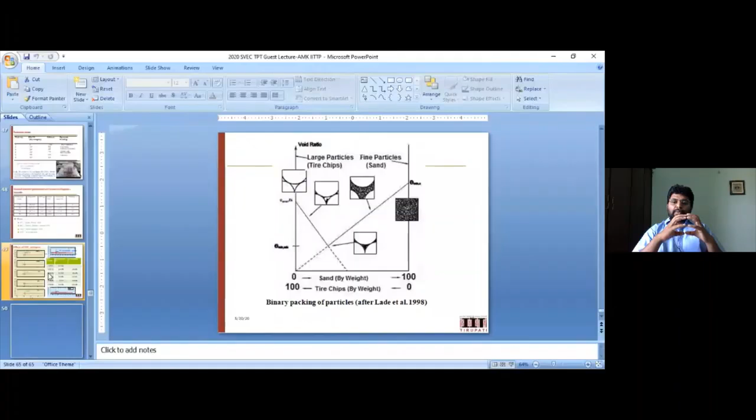Yeah, just to add the answer to the last question, Mohit Misri's question. As you increase the tire chips, I have shown the picture with sand and tire chips together, right? So as it touches the 30-40% mixture content, most of the voids in the tire chips are being replaced by sand, occupying that space. It's like it is making a big compact material.

When you go beyond 40% tire chip content, the void ratio of the tire chips becomes larger. The volume of sand available is much lesser than the voids being created at the higher tire chip percentage, so there is a huge volume gap and the void ratio also increases. If you recall that particular figure, the void ratio goes down and then increases beyond the 40% mark. Because of the additional physical voids being created within the mixture matrix, the interaction between the particles and tire chips will be less. So the peak strength will increase up to some value and then come down.

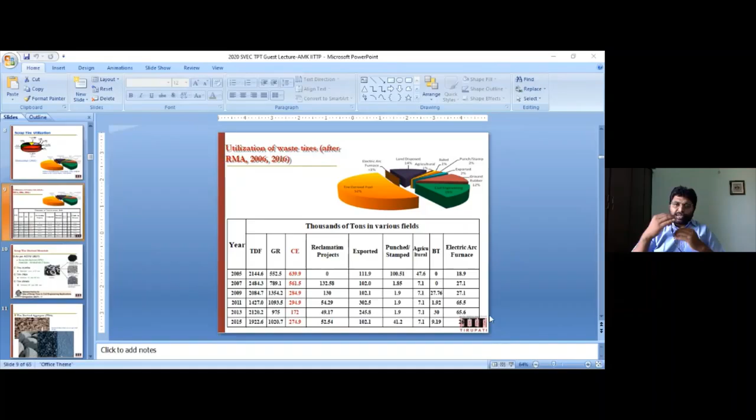Okay, so that's the concept happening. It is related to the strength behavior, related to its physical behavior - physical in the sense voids and other things which are being taken here. I hope I could answer his question.

Yeah, go ahead with the next question. Then I think you can allow them to ask if anybody is there. I have seen the points and then I could tell you. What is the probable reason for that fluctuation in friction angle? That is what I mentioned, right? Yeah, that is what I mentioned.

Then another question from Kaushik: tires lose their strength, when they are exposed to water, how can we consider that? Yeah, when they are exposed to water, I just mentioned that also. So when alone, water mixing, yes, there is definitely a problem. But when you are using it in the matrix form, the effect will be less. So accordingly we have to use it.

Again, some question is there on fire also, related to this one. The other question is, if we use this type of tire strips in RCC - fire related thing, again the same answer. Use the material alone, then yes, there is a probable fire hazard. But when you are using it in a mixture, it will neutralize to some extent. But again, you have to use it judiciously.